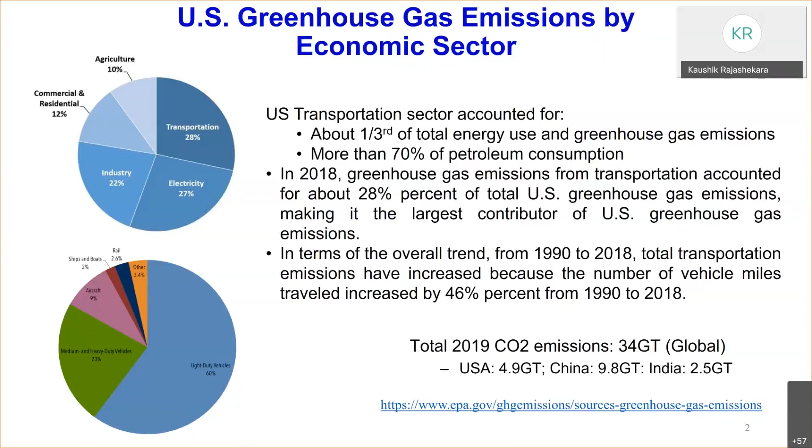Yes. Okay. So this is for the US. US transportation has 28% of the emissions from the transportation sector itself, and the rest of the industries are lower. Even aircraft produces 9% of the emissions in the US. Globally, aircraft produces about 3% of the emissions. So we need to reduce the emissions from the transportation sector.

That is the main idea. So what do we do? Electric vehicles are the best method for reducing the emissions. Since this topic is propulsion and power electronics for electric and hybrid vehicles, I want to focus on the power electronics and propulsion aspects for electric vehicles. So if you look at the vehicle...

The propulsion is provided by the electric motor. There is no internal combustion engine. And where does the power come to the motor? The power comes from the battery. But battery is DC and motors are all AC. Right now, all the automotive manufacturers use AC motors, mostly permanent magnet motors.

All of them use interior permanent magnet motors. So that's why we convert battery voltage to AC. We need an inverter, and then the inverter converts it to variable frequency, variable voltage, so you can control the torque and speed of the motor. This in turn controls the speed of the motor and the power, or the speed at which the vehicle goes, and the entire vehicle can be controlled by this motor.

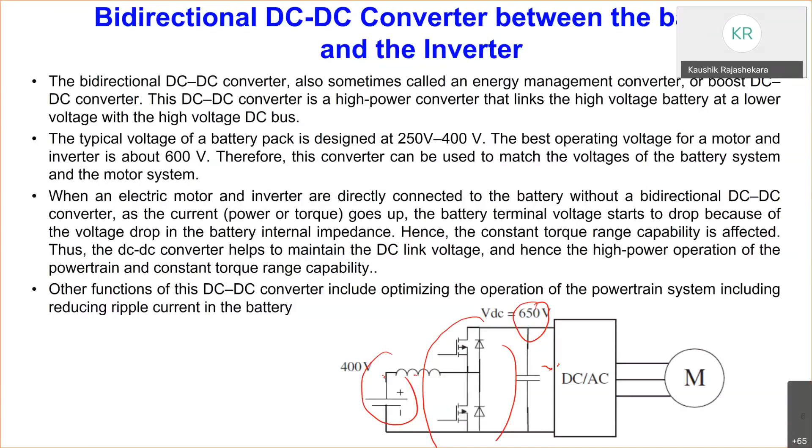Regarding the inverter, generally it is 6 devices, a three-phase bridge inverter, controlled with vector control. We won't go into details of those things. Basically it's for controlling driving torque, braking torque, and motion control. It gets the signal from the acceleration pedal and the braking pedal, and also the vehicle speed signal. Many times the driver is the one who determines the speed. These are all done by the controller.

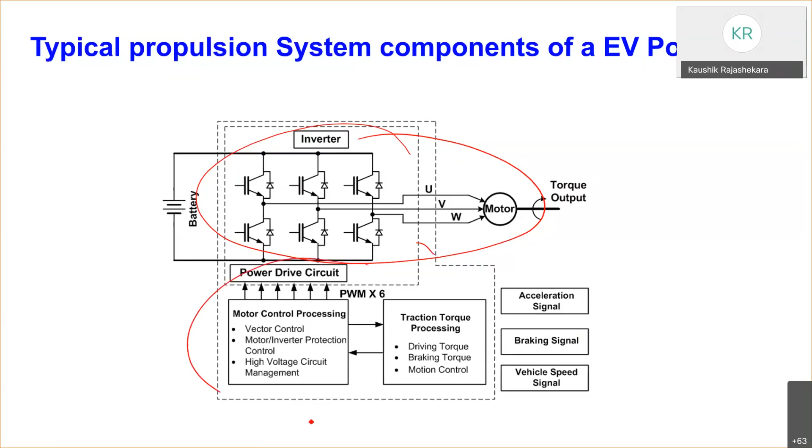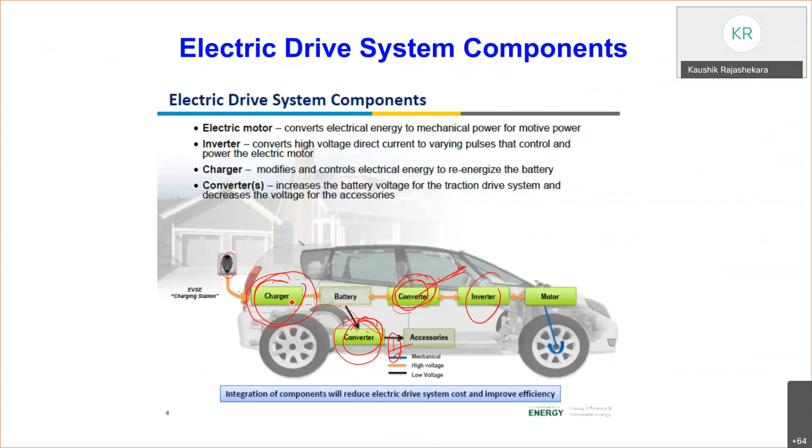In addition, there is a controller for this DC-DC converter, this other DC-DC converter, and this charger. They are all separate controllers for that.

The first commercial electric vehicle, I would say, was the GM Impact brought out in 1990, and the technology led to EV1. But electric vehicles themselves are very old, more than 100 years old. The first electric vehicle was invented in 1837. Even in the year 1900, there were more electric vehicles sold than internal combustion engine-based vehicles.

The reason is at the time gasoline vehicles were more expensive than electric vehicles. But gradually the gasoline vehicle cost came down, and the self-starting engine was invented. Then it became very convenient, and by the 1920s all the electric vehicles disappeared, until the 1990s when the EV1 was commercialized. But between 1920 and 1990 there were a lot of demonstration vehicles, though not commercially available ones.

The GM Impact, whose technology led to EV1, had two induction motors in the front wheels, each one 57 horsepower, and it could go 100 miles per hour. I happened to work on this vehicle. We used 288 MOSFETs, meaning there were two motors, so we used two inverters. Each inverter had 144 MOSFETs, meaning each leg had 24 parallel connected MOSFETs.

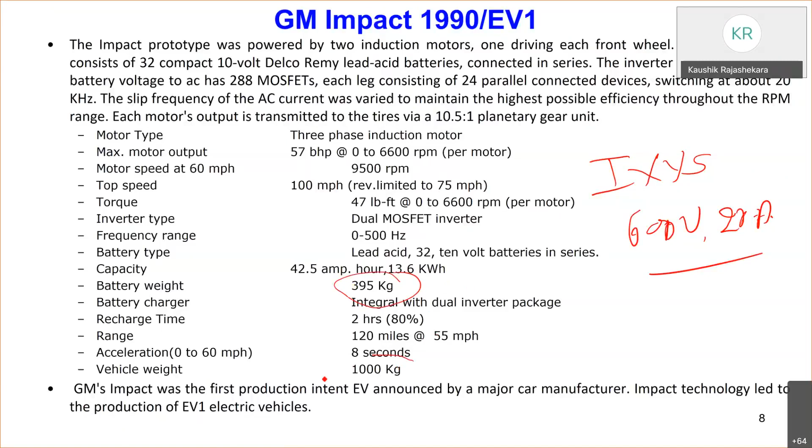And this is the GM EV1. Everything was electric here: electric air conditioning, electric heaters, heated windshield. Everything was electric here.

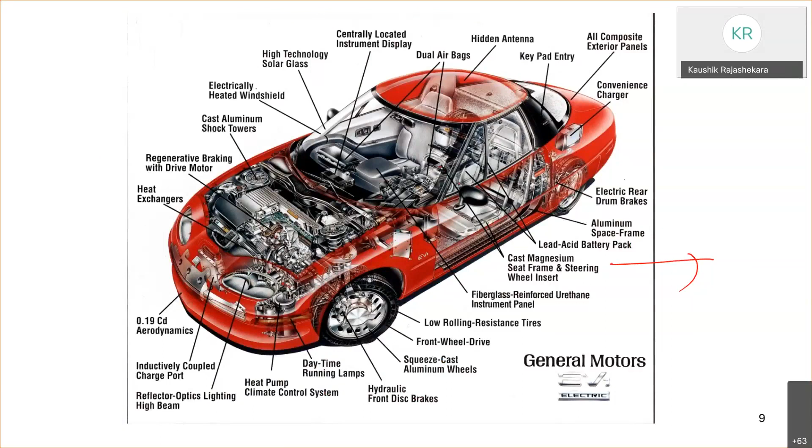But things have changed. Tesla brought this Roadster in 2008. That is a quite expensive vehicle, costing approximately $100,000, but it was a very elegant and very nice car, more like a luxury car. And people who had a lot of money, as a status symbol, bought those vehicles. And it had a range of 220 miles.

That was very good. And there were no lithium-ion battery modules for electric vehicles those days. They were there, but not as modules for the electric vehicle. So they took laptop computer batteries and connected 6,831 lithium-ion batteries in series and parallel to make a battery unit for this vehicle. So it went very well. People started liking that vehicle, and of course, many could not buy because of the cost.

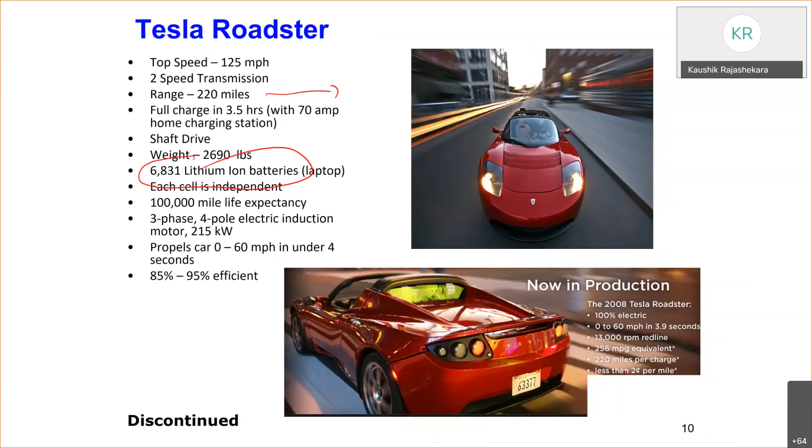In 2012, they introduced the Tesla Model S. This became very popular. It had a range of 230 miles with a 60 kilowatt hour battery, or 300 miles, that is nearly 500 kilometers of range, with an 85 kilowatt hour battery. And it still uses the induction motor of 310 kilowatts, 600 newton meters. But range anxiety was of less concern in this vehicle.

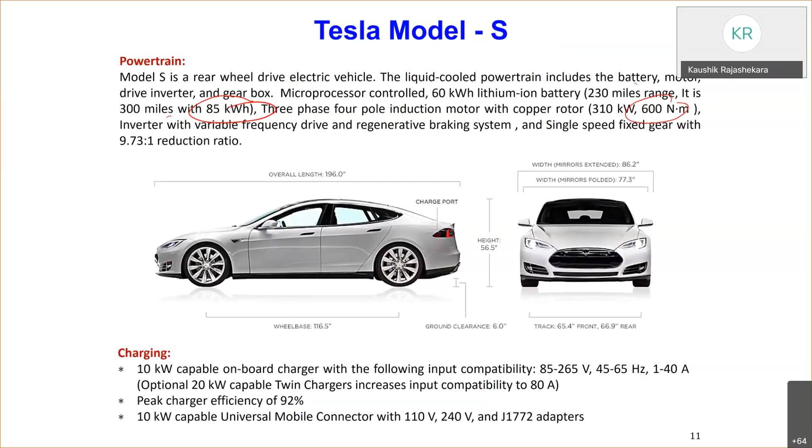And also, there was a 10 kilowatt capable onboard charger, so the batteries could be charged relatively faster compared to the 3 kilowatt chargers used in the earlier versions. So that was a very good vehicle, and it became very popular. So then gradually the other companies also started working on electric vehicles. For example, the Nissan Leaf was available earlier, and several other electric vehicles also came. The Nissan Leaf had 107 miles of range.

Can you hear me? Hello? Can you all hear me? Can you hear me? Yes, sir. Oh, okay.

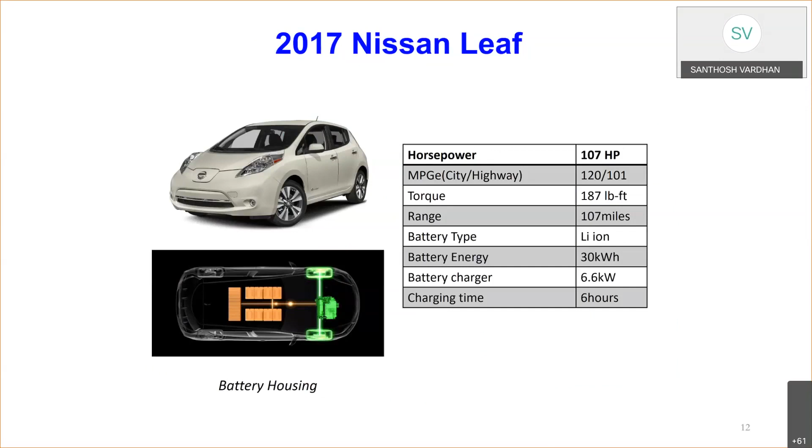So now there are so many types of electric vehicles available. Every auto manufacturer has an electric vehicle now, electric vehicles are taking off, and a lot of people are interested. And just yesterday, General Motors, the world's biggest car manufacturer, announced that by 2035 they will not produce any more gasoline-based vehicles. All the vehicles will be electric vehicles, by 2035.

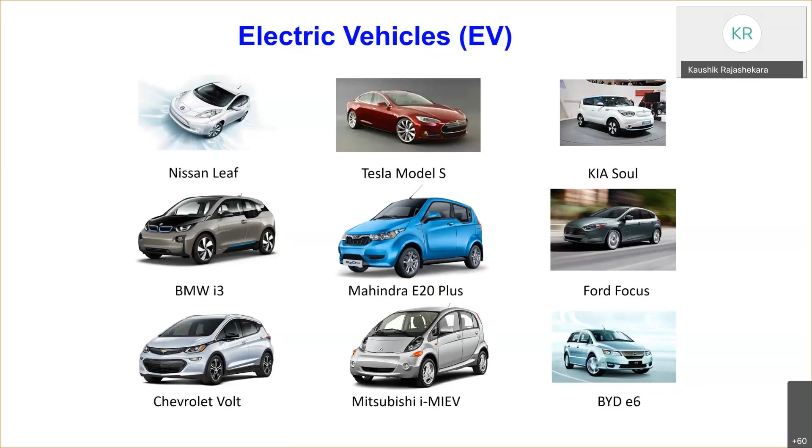So now I will tell you something about hybrid vehicles. There are mainly two types of hybrid vehicles: series hybrid vehicle and parallel hybrid vehicle. A series hybrid vehicle is like an electric vehicle. In an electric vehicle, the propulsion is provided purely by the electric motor. In a series hybrid vehicle also, the propulsion is provided purely by the electric motor. But the charging for an electric vehicle is done externally, meaning you connect it to a wall plug and charge it.

But the series hybrid vehicle has an engine. The engine drives a generator, and the generator voltage is rectified and it charges the batteries. So whenever the state of charge of the battery falls below a certain level, the engine turns on and charges the battery.

Whereas in a parallel hybrid vehicle, the propulsion is provided not only by the engine, but also by the electric motor. Both act together, providing the propulsion power in parallel. That way the size of the motor can be less and the size of the engine can also be less. So smaller engine, smaller motor. Whereas in a series hybrid vehicle, you can have a smaller engine, but you still need a bigger motor, the same size as the electric vehicle motor.

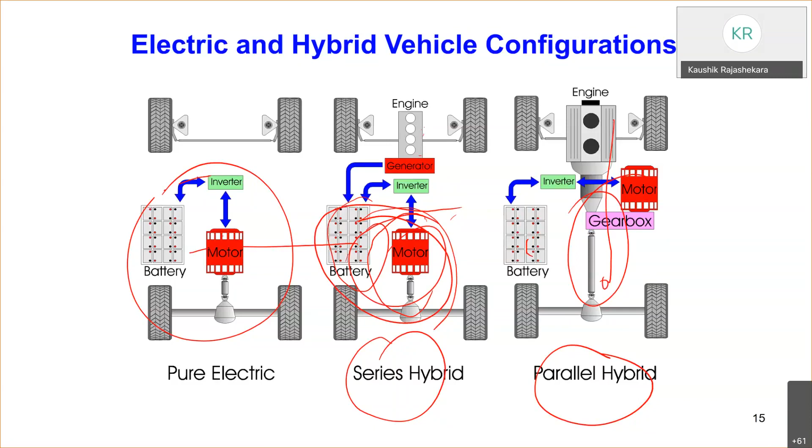Then there is the plug-in hybrid vehicle. So there is the electric vehicle, hybrid vehicle, and plug-in hybrid vehicle. A plug-in hybrid vehicle is the same as a hybrid vehicle, but you can charge the batteries externally. For example, when you are parked at your workplace or at home, you can charge the batteries, similar to an electric vehicle. So the architecture is similar to hybrid vehicles, the charging is similar to electric vehicles, but the battery is a bigger size.

So then what is the advantage of a plug-in hybrid vehicle? If you have a bigger battery and you charge it overnight, you can drive certain miles pure electric. For example, the Chevy Volt, I will talk about it soon. It is not sold anymore now. It was giving 55 miles pure electric.

So if somebody is driving less than 55 miles a day, and then at night they charge it, then this vehicle can be used only as a pure electric vehicle. They never have to fill up gasoline for that vehicle. Only if they go long distance will the gasoline be used. So that is the advantage of a plug-in hybrid vehicle.

So even in hybrid vehicles, there are various categories like micro hybrid, mild hybrid, full hybrid. A micro hybrid is like an existing car, but in an existing car, there is an alternator. What is the alternator used for? Charging the 12 volt battery. So here, instead of using it just as a generator to charge the 12 volt battery, you convert it into a starter generator system. So you make that alternator also a motor.

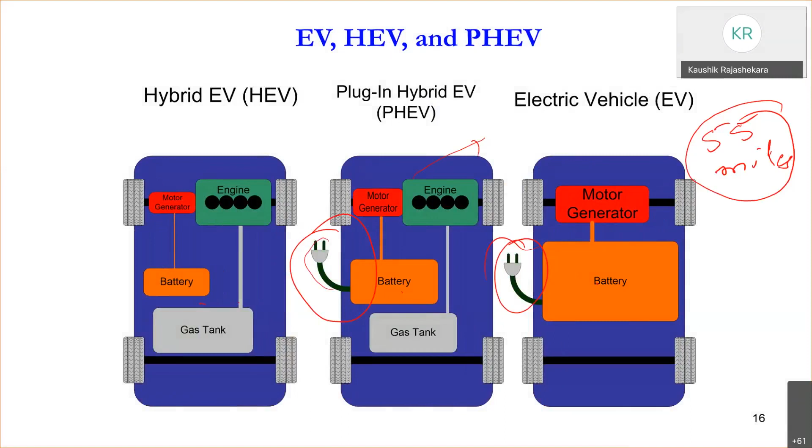Whereas in a full series hybrid vehicle, the propulsion is provided by the battery and also by the engine driving the generator. So power goes directly to the electric motor from the generator, and power also goes from the battery to the electric motor. Okay. So both act together. You can replace the engine and the generator with a fuel cell, then it becomes a fuel cell vehicle.

Okay. So if you look at the degree of hybridization, micro hybrid gives 5 to 10% fuel economy, mild hybrid 7 to 15%, full hybrid greater than 30%, and plug-in hybrid can give greater than 50% in fuel economy. Power levels for the micro hybrid are 3 to 5 kilowatts, for mild hybrid 10 to 15 kilowatts, for full hybrid greater than 20 kilowatts, and for plug-in hybrid more than 20 kilowatts. Okay, that is the electric motor power. In addition to this, there will be the engine providing power.

And you see that with micro hybrid, you can automatically start-stop the engine. With mild hybrid, you can use regenerative braking, and it also provides assist to the internal combustion engine. If you use a full hybrid, you can drive on the electric motor. For a plug-in hybrid vehicle, you can recharge the batteries from the outlet. So these are the advantages.

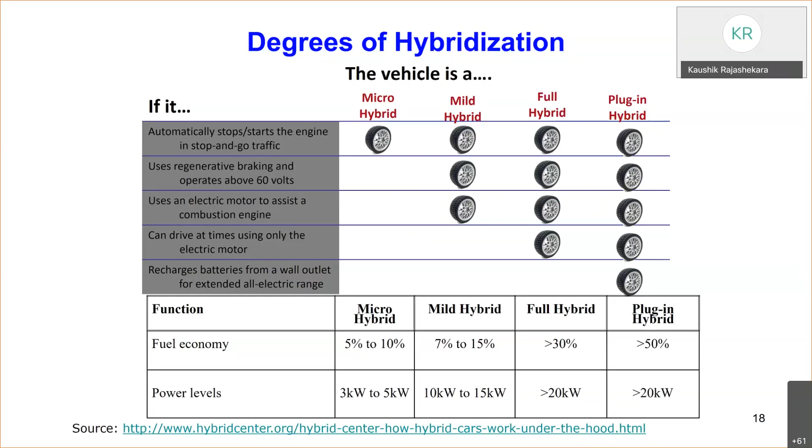So these micro and mild hybrids are getting very popular in Europe because by 2022, next year, or by the end of this year, they want to bring down emissions to 95 grams of carbon dioxide per kilometer. So that is their goal. Right now, it is more than 100.

So what they want to do is, in addition to electric and hybrid vehicles, take the existing cars and convert them by putting in a small inverter as an integrated starter generator. It is called the belt-driven starter generator. That way, you can save about 5 to 10% in fuel consumption and also reduce emissions.

And so that is the belt-driven starter generator system, and it operates at 48 volts. They want to increase the voltage to 48 volts. And the other one is the integrated starter generator. That is the mild hybrid.

You see that the electric motor is mounted between the engine and the transmission here. So that way you can put a higher power motor. Here the motor power is about 2 to 3 kilowatts. Here a 5 to 10 kilowatt motor can be used, because the motor can transmit more power when it is on the shaft.

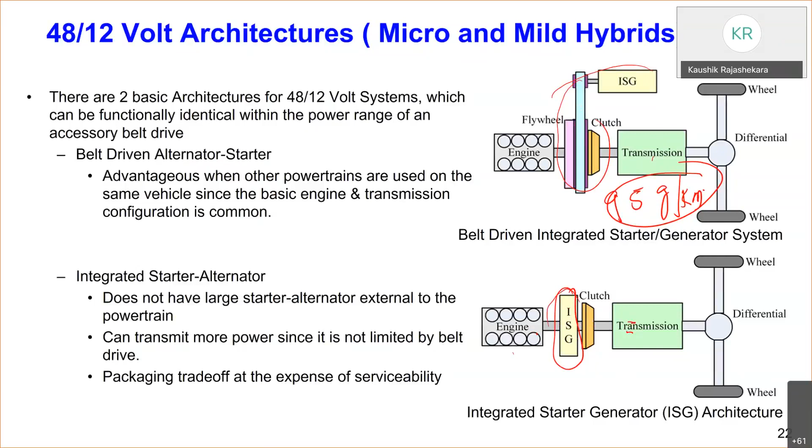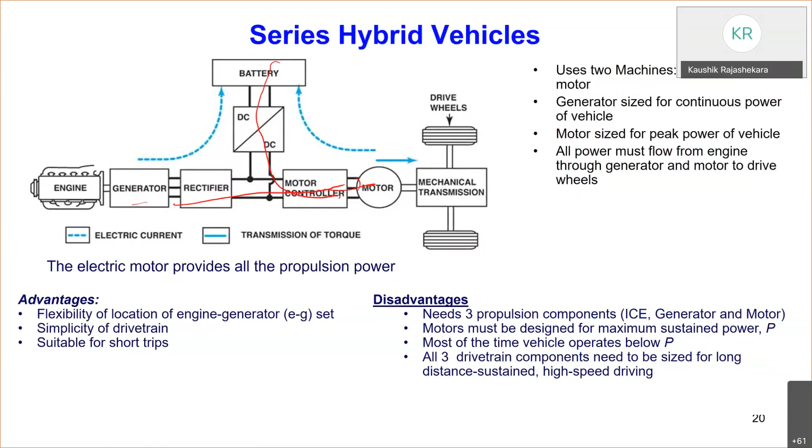Okay. So series hybrid vehicle, as I mentioned earlier, the engine drives the generator and there is a rectifier. The power goes to the electric motor directly, and the battery power also can combine together. So both the power can be combined. So that is the series hybrid vehicle. It is a simple drive system, and the propulsion is purely electric. And whenever you want to charge the batteries, the engine is turned on and it drives the generator and it charges the batteries.

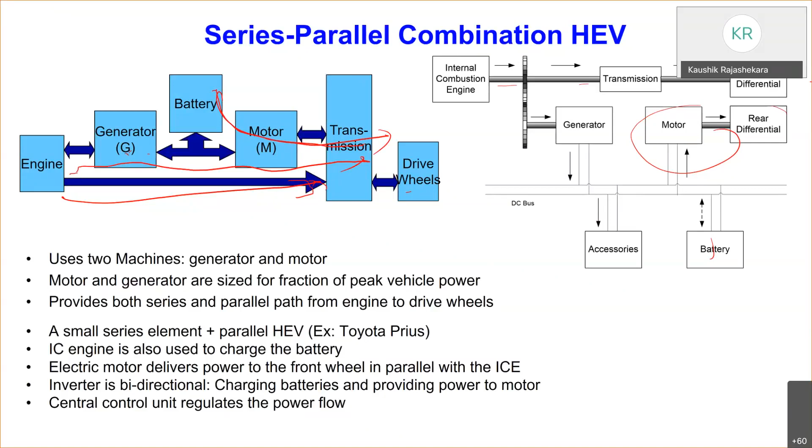So this is the Toyota hybrid system. This is a planetary gear system. The planetary gear system. So the engine power is combined. Then the engine drives the generator, and the generator charges the batteries here like this. There are two inverters here, even though it is shown as one inverter; I will show you the diagram next slide. And the motor power, they are all combined into one here. Okay, and then it goes to drive the wheels. This is the differential.

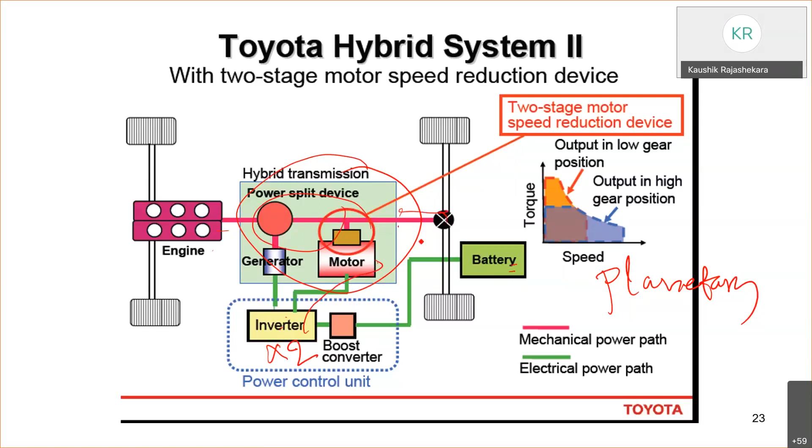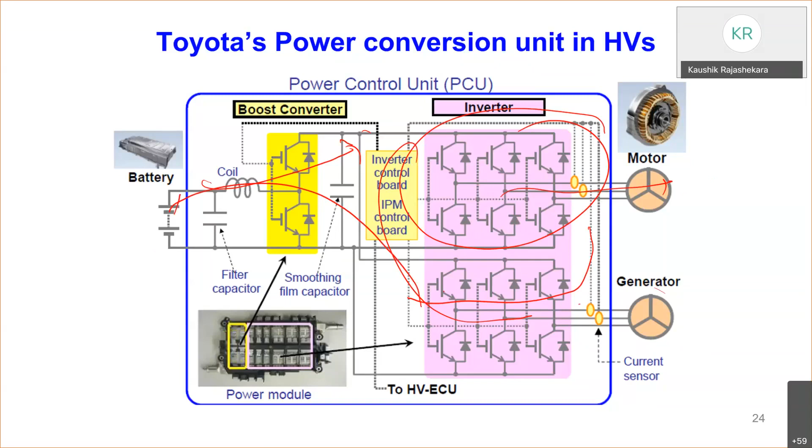So see, as I said earlier, there is one inverter that provides the propulsion power, and another one acts more like an active rectifier and provides the power from the generator. Also, the power goes from here and the power also goes from here. When not much power is required by the electric motor, then it charges the batteries also. So that is the Toyota Prius, and Toyota uses this type of architecture in most of their hybrid vehicles. So Toyota, for example, this is how it is.

The first generation was 288 volts, but there was no boost converter. The battery voltage was 288 volts, going directly to the inverter, and the motor power was 33 kilowatts. The second generation used 202 volts with a 500 volt DC link voltage, 50 kilowatts. And in the next generation, the battery is 202 volts. They increased the voltage to 650 volts using the boost converter. That way, the power went up to 60 kilowatts. So it gives about 38 kilometers per liter, nearly 40 kilometers per liter.

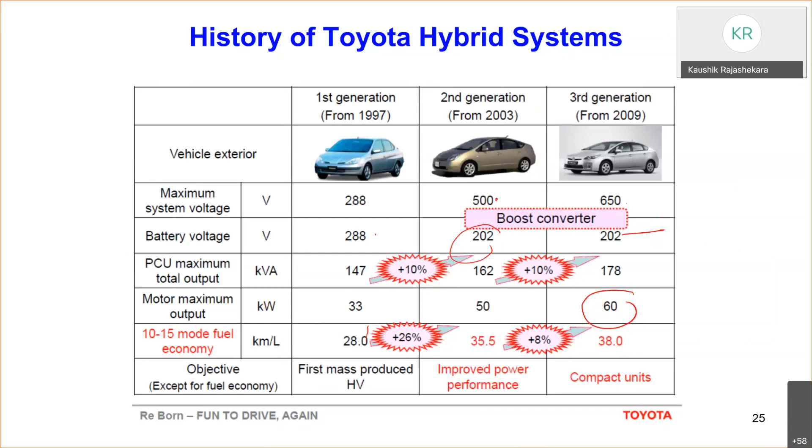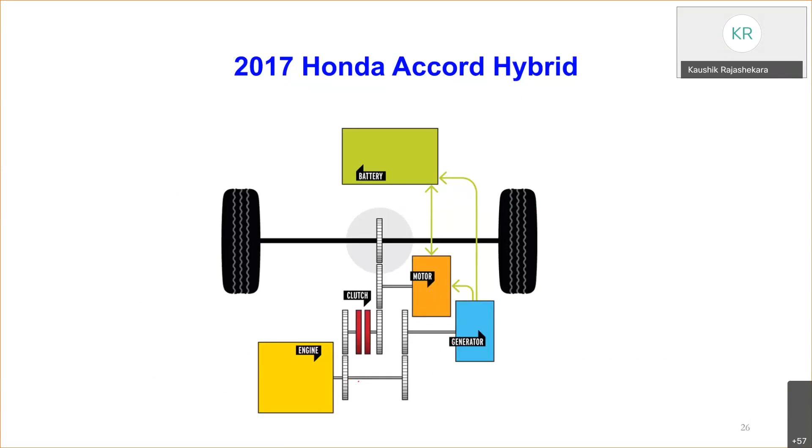Honda also has a similar hybrid architecture. Honda used to have the mild hybrid architecture, the integrated starter generator, which I showed you earlier. But they discontinued that system. Now they have a system similar to the Prius, but the operation is slightly different. They have an engine, a generator, a motor, 2 inverters, 2 motors, and they boost the voltage to 700 volts. The battery voltage is boosted to 700 volts. It is shown here.

So at low speeds, it operates as a pure electric vehicle. At normal speeds, if the speed goes up, then the battery also acts as the electric power, and power is also coming from the engine driving the generator. So the power is coming from both.

At high speeds, generally only the engine is operated. The battery and the motor will not be providing any power. But when more power is required at high speeds, then the battery and the motor will come into picture and add power to the engine power. So that is slightly different from the operation of the Prius.

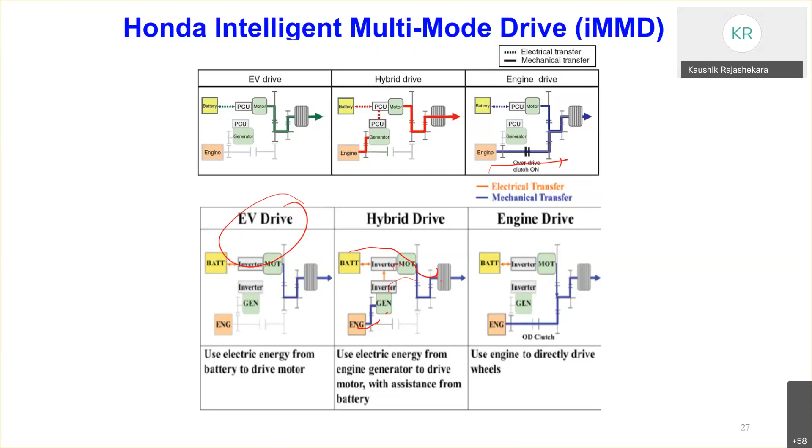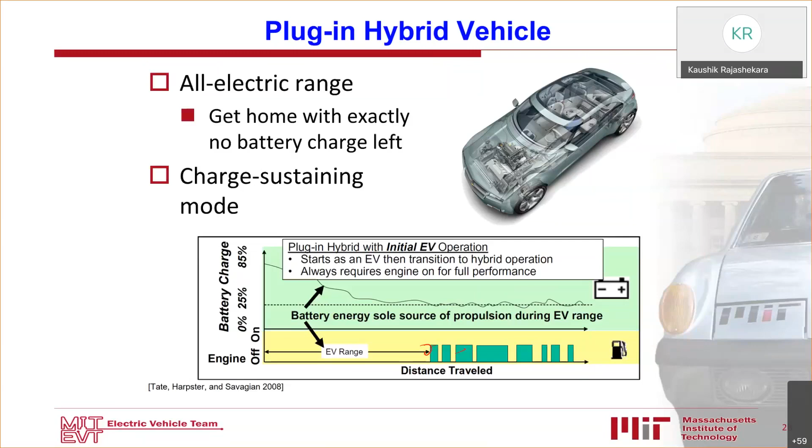So a plug-in hybrid vehicle, as I mentioned earlier, you use it as an electric vehicle as much as you can. Then once the state of charge of the battery falls below a certain level, the engine is turned on, it drives the generator and charges the batteries. Then you maintain the state of charge of the battery by controlling when the engine has to be turned on and when it has to be turned off. So you maintain the state of charge at a certain level. That is the plug-in hybrid.

Toyota has a plug-in hybrid vehicle. It is called Prius Prime. It has an electric vehicle range of 25 miles, and with full charge of the batteries and a full tank of gasoline, you can go 640 miles, almost 1,000 kilometers.

So you can go 1,000 kilometers, maybe from Bangalore to Bombay. I think it's about 1,000 kilometers, right? That much you can go without stopping the vehicle anywhere if you want to. So that is the advantage of plug-in hybrid vehicles. And it uses 600 volts; the battery voltage is 351 volts, so it is boosted to 600 volts.

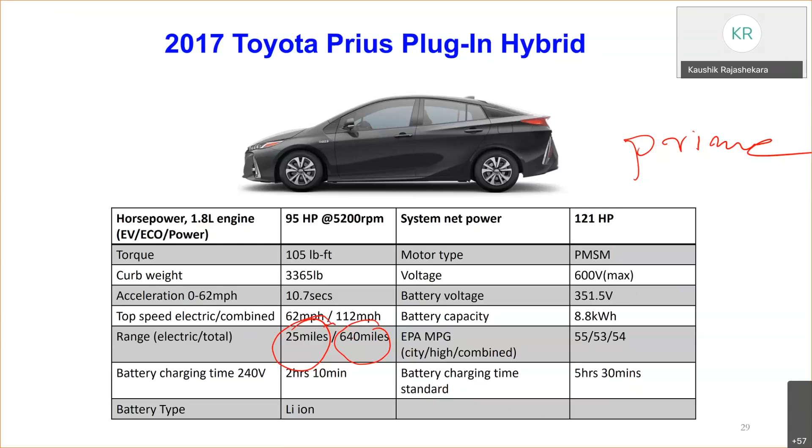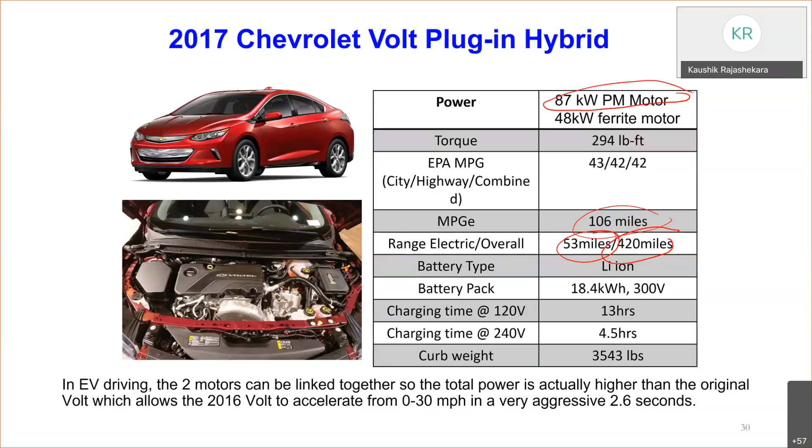They had two motors: one is an 87 kilowatt neodymium iron boron permanent magnet motor, and a smaller 48 kilowatt one, which acts mostly as a generator, is a ferrite motor, not a rare-earth permanent magnet motor. That way they could reduce the cost of the overall motor.

Then fuel cell vehicles. I think most of you know how a fuel cell works; I will very briefly tell you. There is an anode and a cathode. There are different types of fuel cell, but we will talk mainly about the PEM fuel cell, proton exchange membrane or polymer electrolyte membrane fuel cell. It operates between 80 to 100 degrees Celsius. Generally, all fuel cells, like the solid oxide fuel cell, need hydrogen as the input. Hydrogen is the fuel.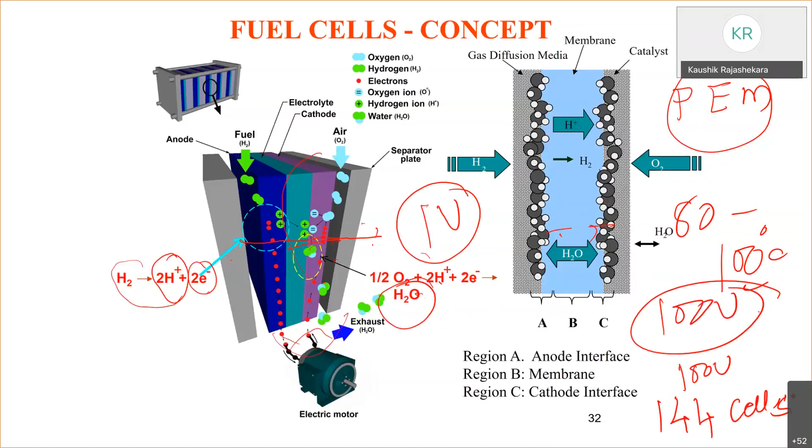But a fuel cell operates around 0.7 volts when it is loaded. So if you really need 100 volts when it is loaded, then you need 144 cells because each cell operates at 0.7 volts only. So now you have a fuel cell stack, it is called. A number of cells connected in series and parallel is called a fuel cell stack. That provides DC and its voltage changes depending on the load. That's why you need a DC-DC converter, and also, of course, DC to AC, you convert it.

And how do you get the hydrogen? Hydrogen you can obtain using electrolysis of water or reforming gasoline or methanol or ethanol and all those things. Reforming means converting any fuel to hydrogen; it is called the reforming process, and it is called the reformer. And also you can use an additional battery to provide the power during the transients. So that is the automotive fuel cell system.

Why is it not moving?

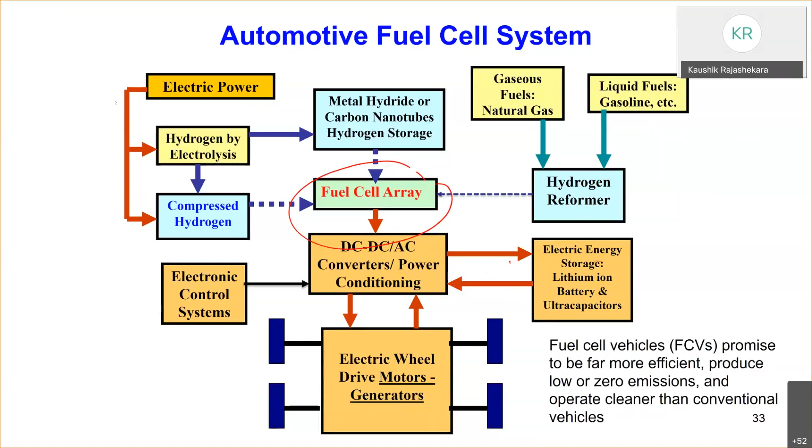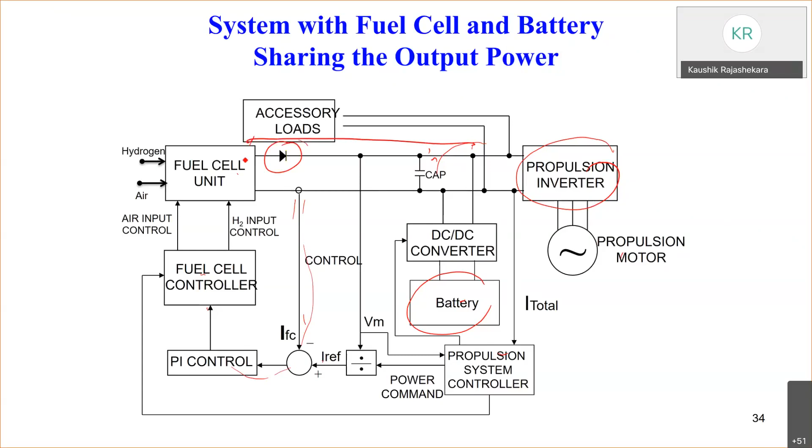How do you control the hydrogen to the fuel cell? It depends on the amount of current required. Hydrogen is current. So you need to measure the current here. Depending on how much current you need, that reference is coming from the propulsion system controller; compare the fuel cell current and then adjust the hydrogen input. So hydrogen input is adjusted or varied according to the required current. And there is a diode here because we don't want negative current to flow to the fuel cell unit. That's why we always use a diode in series.

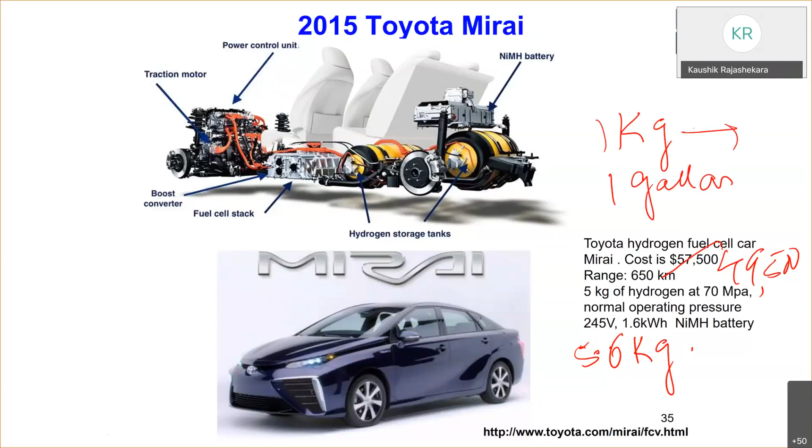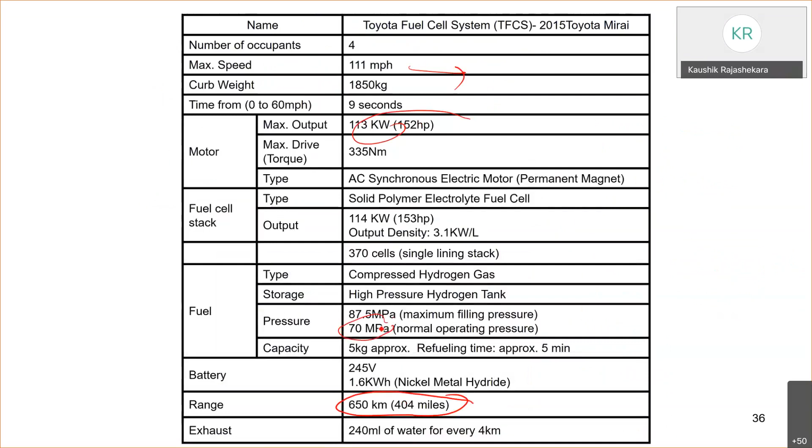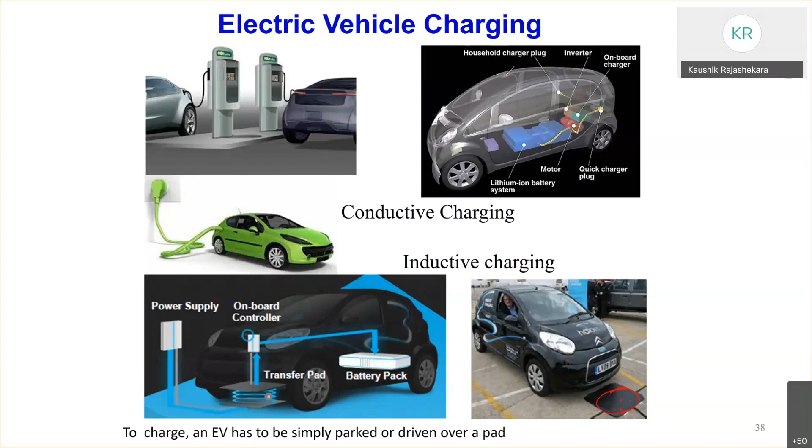And there is fast charging. Fast charging enables a direct connection of DC loads to the vehicle battery for very fast rate charging. Direct current charging. So super fast charging stations are available now. For example, with 15 minutes of charging, you can go up to 500 kilometers. Super fast charging stations at various places in the country.

Siemens is producing, for example, 150 kilowatt at 920 volts. Recently, BYD of China got UL approval for a 150 kilowatt fast charger from UL, Underwriters Laboratories. So several companies are working on fast chargers now.

The idea is to install these fast charging stations all over the country, like we have gas stations all over the country. Anywhere you can go and fill up your gasoline. Like that, anywhere you go you can charge the batteries. So this is the conductive charging: electrical grid, AC to DC converter, and there is the DC-DC converter that charges the batteries.

Recently, there are more and more bidirectional converters instead of unidirectional ones, so you can have power going to the grid also. So when the electric vehicle is not being driven most of the time, you can connect it to the grid and provide power.

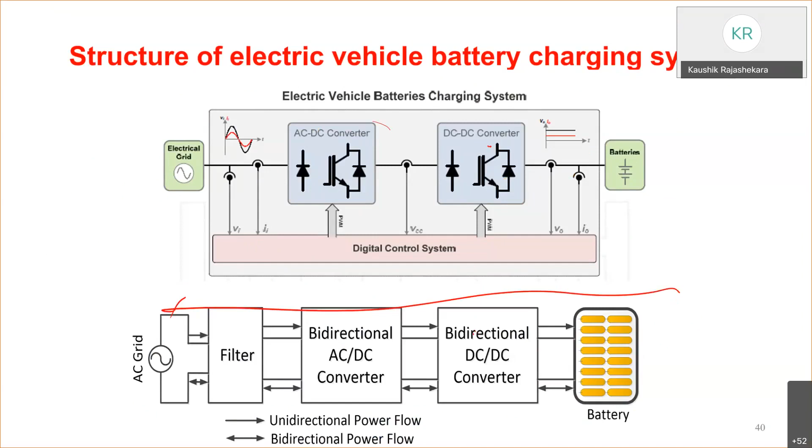There are various topologies for DC-DC converters and for charging and all those things. I think I will skip that one.

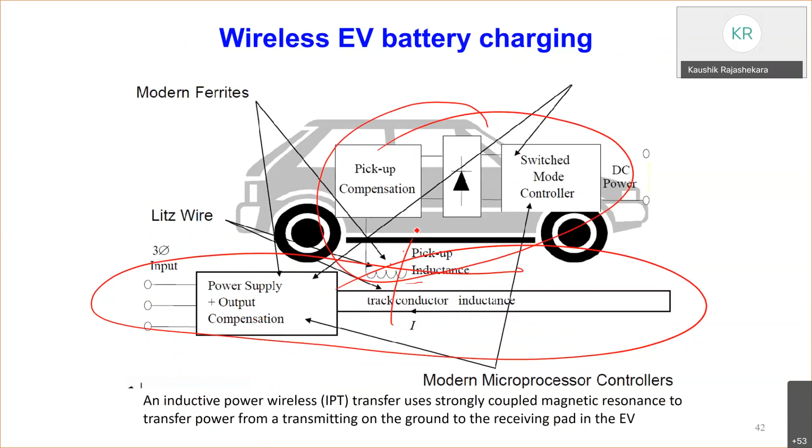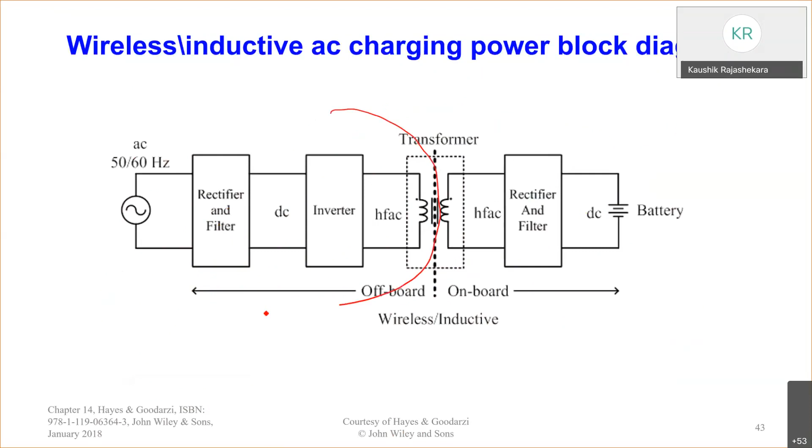So this is the block diagram of the wireless charging system: AC, rectifier and filter, inverter, high frequency, and this is on the ground, wireless, and this is in the vehicle, battery.

Recently there is a lot of interest in using wide bandgap semiconductors in electric vehicles because they can operate at a very high temperature, of the order of theoretically up to 300 degrees Celsius. The reason they want higher temperature devices is then you can have a smaller heat sink, so you can reduce the size of the overall inverter.

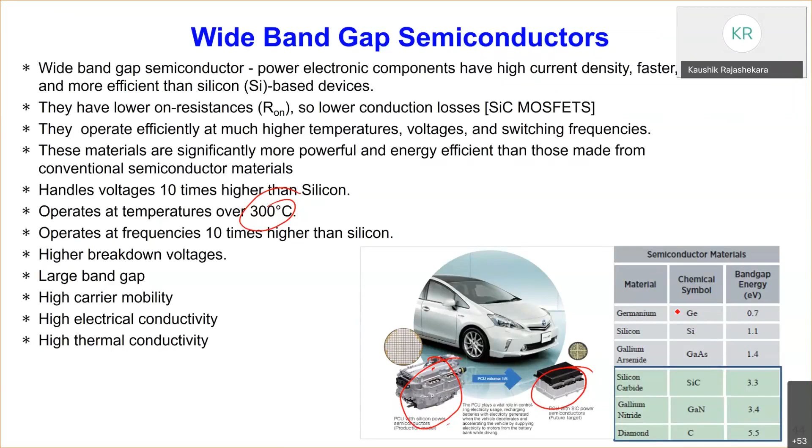For example, this is a silicon device and this is silicon carbide. Toyota has recently tested, and they say they can reduce it by 1/5 using silicon carbide devices. Also, silicon carbide devices have a higher bandgap voltage, and so they have better thermal conductivity than silicon devices.

A recent trend is to integrate the motor and inverter. There are several companies like BorgWarner, one of the major suppliers of drive systems for electric vehicles. They do it for many companies. You basically connect the battery terminals here, and the inverter and the motor are all inside. And this is another design.

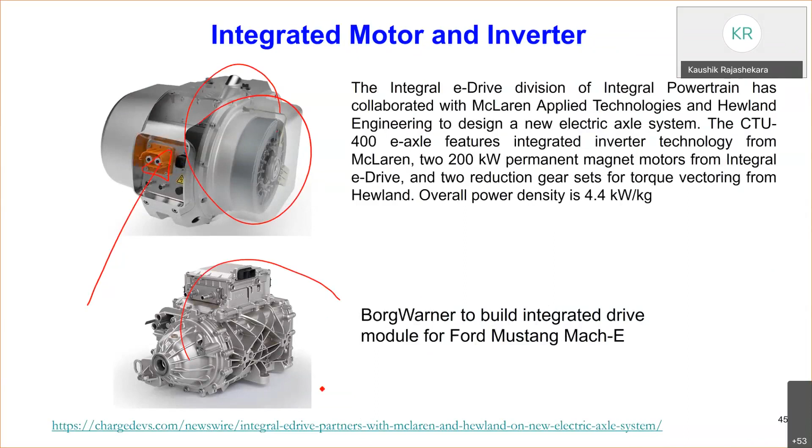So what are the trends for the future? The Department of Energy has commissioned this electrical and electronics technical team roadmap, which requires advancing the technology so that you can reduce the cost and increase the power density. These are the technical targets.

For power density, they want 50 kilowatt per liter by 2025, for the electric motor. And for the power electronics, cost has to be $2.7 per kilowatt, and power density 100 kilowatt per liter, and even for the DC-DC converter, these are all the technical targets.

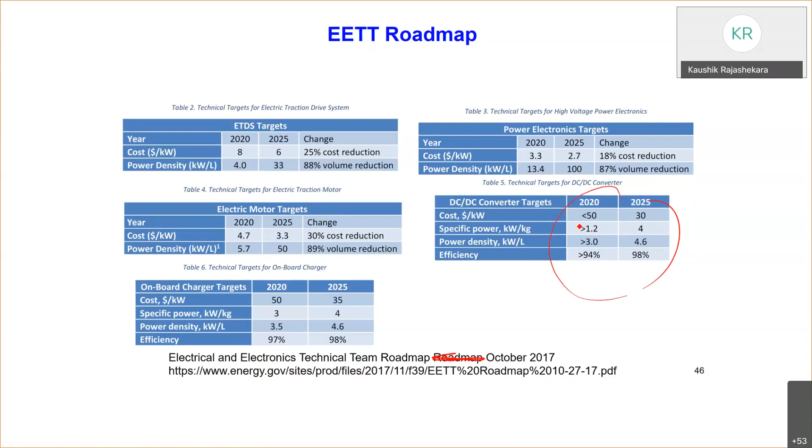So where are we going next? We started with 12 volt start-stop, the micro hybrids, then 48 volt integrated starter generators, then full hybrids like the Toyota Prius, plug-in hybrids like the Toyota Prius Prime, and electric vehicles like Tesla. Now there is a lot of work going on connected electric vehicles: self-driven, connected, autonomous cars, and vehicle-to-grid operation.

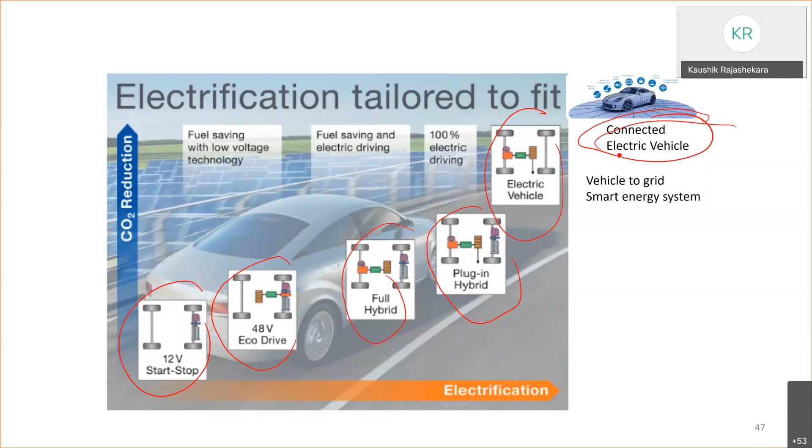In connected vehicles, the vehicles can talk to each other and communicate. So power electronics is a very important technology. Whether it is for airplanes, cars, or anything, you need power electronics. Without power electronics, we cannot do anything. Not only for transportation, you need power electronics for everything.

So if General Motors, by 2035, wants to go for pure electric vehicles—an electric vehicle is nothing but electric motor and power electronics—how many electrical engineers will they need? Right now they employ so many mechanical engineers for internal combustion engine systems, but now all those engineers will be replaced. So as so many auto companies in the world switch over to electric vehicles, there will be a large shortage of electrical engineers required.

For example, Norway wants to replace everything by 2030—I think all vehicles have to be electric vehicles. So the trend is towards electric vehicles.

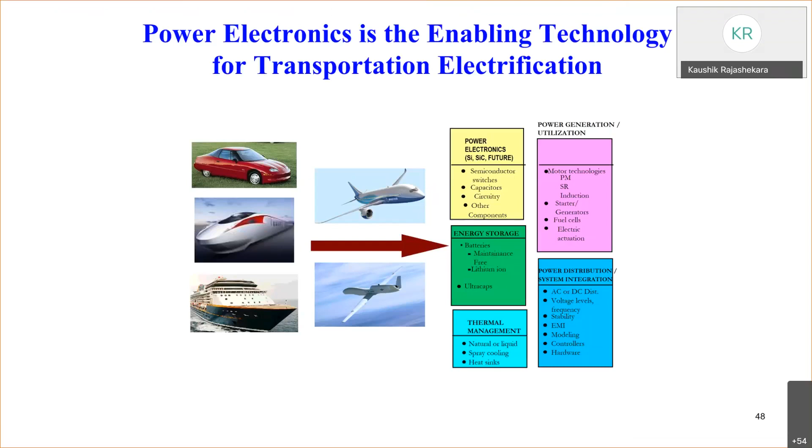I think I will stop here. Maybe I can answer more questions if you have. Okay, because I think we exceeded our time. I think so. Yeah, because we didn't start late anyway. So, any questions you have?